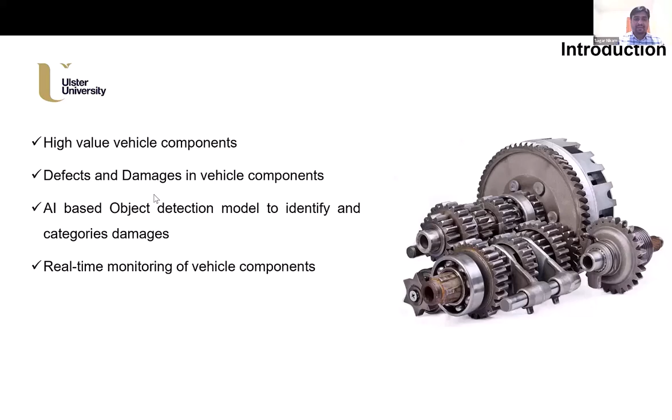Now let's look at the different types of defects or damage that can take place in vehicle components. Vehicle mechanical components are often subjected to stress, friction, and environmental factors, which can lead to various issues. Identifying and understanding these damages is crucial for maintaining the performance and safety of the vehicle.

The first damage is dents or digging, which often happens when a component is hit or impacted by another object. This looks minor, but if not rectified earlier, it can cause a lot of problems.

Next is plastic deformation, where the material is permanently bent or reshaped under stress. This can reduce the part's effectiveness and lead to further mechanical failures.

Another is edge deterioration, which happens when the edges of the component wear away over time, often due to friction or stress. Another is wear, which refers to the gradual removal of material from the surface of the part, one of the most crucial issues in high-usage components.

Another critical damage is cracks, which can develop due to repeated stress or a sudden impact. Cracks are particularly dangerous because they can lead to catastrophic failure.

Finally, there's the defect called heat check. These are defects occurring on high temperature surfaces, or surfaces exposed to high temperature. Due to repeated heating and cooling, small cracks develop on the surface. This type of defect usually occurs in brakes or engines where high temperature is involved.

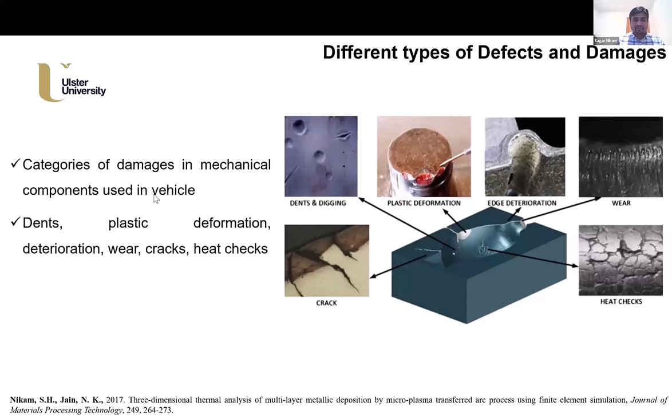If we take a look at different types of damages, understanding the categories of damage is very important from an AI perspective. AI is obviously a data-driven thing, and we humans need to train that AI model based on data. But since humans are involved, we should know what type of damage it is, what are the categories of damage, and what type of damage falls in each category.

Understanding these damages is very important because it helps you take informed decisions. AI can help give an optimized solution, optimized understanding of the damage, and a good repair understanding, but we as humans need to train the AI model.

First, we need to understand the different damages in mechanical components, and how to use these categories to train the machine learning model.

Damages are usually categorized into three main categories: catastrophic damage, manufacturing damage, and operational damage. Manufacturing damage happens in the manufacturing process, but in vehicle components, catastrophic damage and operational damage are very common.

First, let's take a look at catastrophic damage. These are often caused by major issues like faulty design, extreme loading conditions, or using defective material, or by improper handling or improper storage of the material during transportation. This type of damage is very severe and affects the quality of the material.

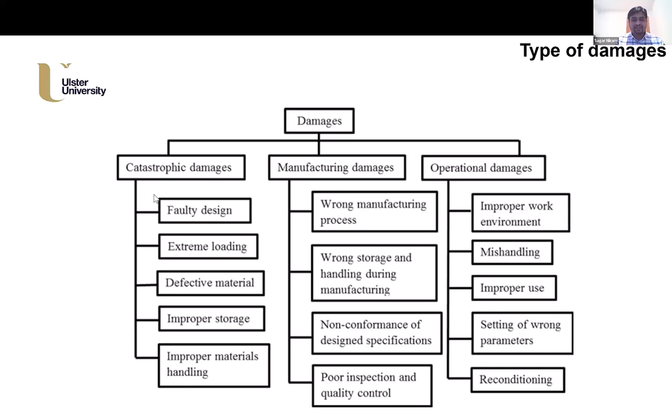These are cracks and broken teeth. If you look at the crack, this occurs when the material is exposed to repeated stress, such as high load or thermal cycles, which eventually cause a small fracture to form. Over time, this crack grows larger, weakening the structure of the gear and increasing the risk of failure. For instance, a crack on a gear tooth can compromise the gear's ability to transfer torque effectively.

The other type of damage is broken teeth, which is even more severe. That happens when the stress on the gear exceeds the material capacity, often due to sudden shock loads, poor maintenance, or defects in the material itself. A single broken tooth can cause misalignment and impact the entire drivetrain, potentially leading to further damage in connected components. What's particularly important to note is that such damages are not just a result of normal wear and tear, but can also stem from factors like improper use, lack of lubrication, or manufacturing defects. AI can help us in early detection of these issues and prevent catastrophic failure.

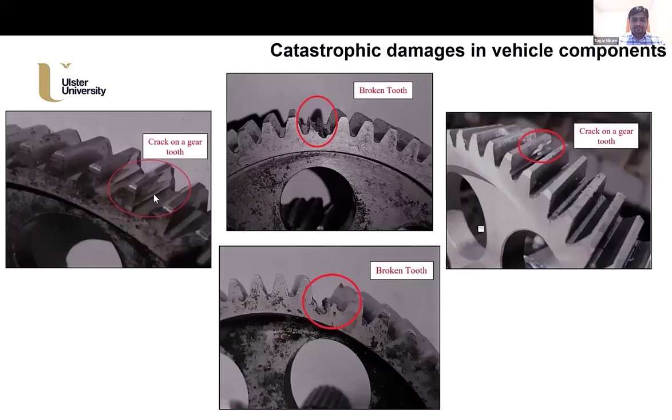Another example is operational damage. Manufacturing damage is more on the manufacturing side, but catastrophic and operational damage occur when particular components are installed on a vehicle and being used in certain environments, and how that usage is affecting or damaging the product. So there's catastrophic damage, and another one is operational damage. Operational damage occurs when components are exposed to challenging conditions or used improperly, which can significantly affect their performance and lifespan.

Another major cause of operational damage is avoiding proper and timely maintenance. For example, skipping regular checks for lubrication, alignment, or wear can lead to faster degradation of the component. So when gears or other parts operate without sufficient lubrication, friction increases and causes the surface to heat up, and this heating wears the surface of the gear component prematurely, causing damage to the surface or heavy wear and deterioration.

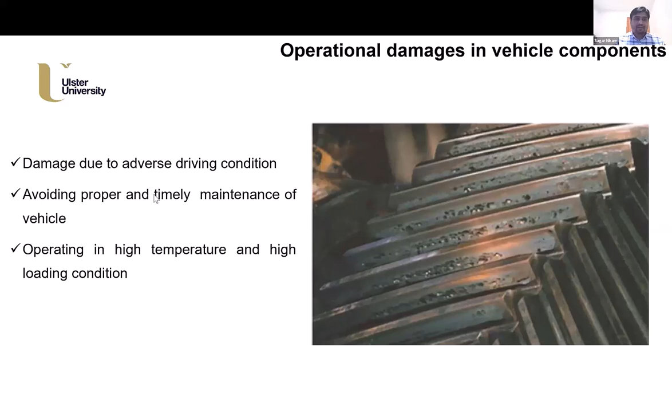So this was all about the damages, as we talked about catastrophic damage and operational damage, the two main categories that come under the vehicle component.

Next comes monitoring - how to look at these defects, how to capture them. This is a crucial part because the vehicle system itself is very complicated, and getting useful data out of it is important, because AI completely relies on data. Unless you have good data, AI can't give us a good informed decision. So the next important thing is monitoring damage and defects in vehicle components.

In modern vehicle systems, for everything there is a sensor placed in the vehicle. Like if you want to monitor the tire pressure, there is a sensor. So everything nowadays is monitored by sensors in the equipment, and along with the sensor...

Any questions here? Right.

Continuously monitoring the health of the vehicle is very important. For this purpose, we have sensors and onboard diagnostic systems. These sensors track parameters like temperature, pressure, vibration, and load in real time, which helps detect early signs of damage and defects - this is the term for predictive maintenance. By doing this, they provide valuable data that can prevent failures and reduce downtime.

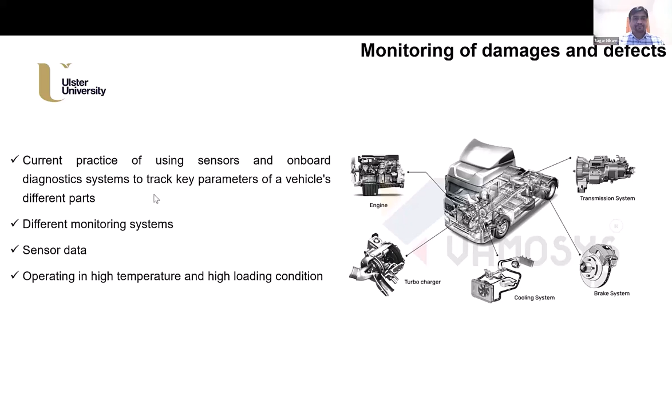Now we are going to look at real-time monitoring. Obviously nowadays sensors do real-time monitoring, but if we have a monitoring system in every car, for example, there is a tire pressure monitoring sensor. The sensor tells you on the dashboard when the tire pressure goes down - at that time it tells you the tire pressure is down, now you need to fill the air. So that's not really proactive sensor information.

We don't do it at real time - we don't get data in real time. Obviously the sensor is capturing data in real time, but we don't get that information in real time. But real-time monitoring is very important nowadays, mostly done in EVs as those EVs come into the market. So real-time monitoring of vehicle components is very important.

For this purpose, for real-time monitoring, we make use of vision-based systems, or test benches designed in labs which are used for data collection. For example, you can see the test bench at the bottom left figure - this test bench is for an engine, which captures every data point for the engine. You capture the data, test the model based on the data received, and once the model is tested on this test bench, you can deploy that validated model on your actual engine, helping track the health of vehicle components in real time.

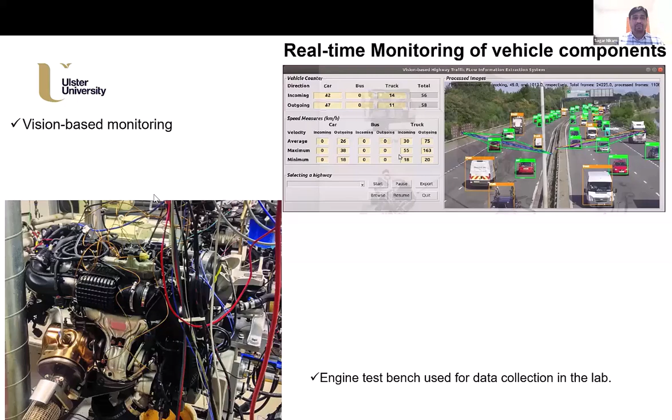That was one of the studies I read recently. It wasn't in a paper, it was a magazine, and I think this particular system was implemented in Birmingham, here in the UK. So that was how they made use of this real-time monitoring system, real-time monitoring sensors, to capture the health of the vehicle or any kind of conditions of the vehicle.

Now these are some examples that I took from the previous test bench. In the previous test bench, a lot of things were captured. One of the data points was real-time torque monitoring. They monitored the engine torque from the test bench to check how the engine performs, and they analyze this data and validate it using the control condition.

In this figure, on the left-hand side we can see the schematic of the engine system. The blue arrow represents the flow of air as it moves through the system, starting from the intake air filter, passing through the compressor and intercooler, and finally entering the engine block via the intake manifold. The red arrow represents the flow of hot gas produced during combustion. This gas drives the turbine shaft, which powers the compressor of the turbocharged system. This flow diagram gives a clear picture of how the air and exhaust gas move through the system.

Now on the right side we have a graph which shows real-time torque monitoring. I'm not sure whether you can see the blue line there - the sensor records the actual torque, and based on that data, the model is trained, and a time series model, or real-time model, is designed which helps you track the actual torque of the engine.

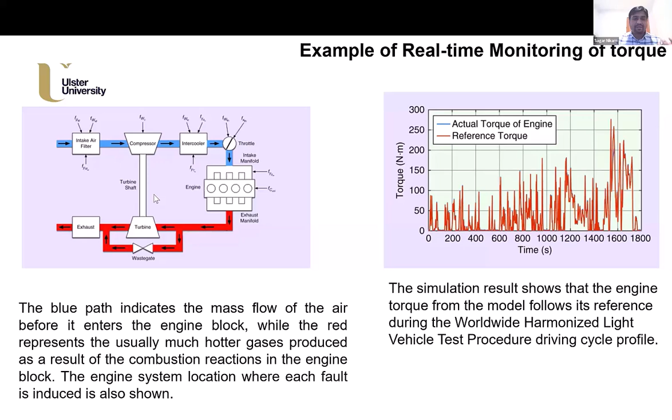There is another red line which shows the reference torque. The reference torque is like - your engine's blue line, which is actual torque, and your reference torque should go together. If there is any abnormality in the system or any kind of issue with the engine torque, then suddenly there is a spike in the lines, which gives you the idea that this particular engine is not performing to the mark that you expected. That is the point where we can carry out engine maintenance work or something like that. So that is more aligned with predictive maintenance.

Another important thing is condition monitoring. It's a very critical process for ensuring the reliability, efficiency, and longevity of various mechanical components. Condition monitoring - the word itself says condition, meaning the behavior of the particular vehicle component when deployed in an actual environment or actual conditions. So monitoring all those conditions - there are different mechanical components in the vehicle, like rotary machines, compressors, pumps, other motors, and these components determine which conditions need to be monitored.

Traditionally, condition monitoring relied heavily on vibration. Previously, only vibrations were measured using sensors, and based on that, analysis was done on whether there were irregularities in the component, or misalignment, imbalance, or wear. Now, vibration analysis is not obsolete, but it's still a very important tool nowadays, still being used for capturing sensor data, but there are other ways as well which can help give the actual picture.

For example, there are thermography sensors, like infrared sensors, or thermal cameras or normal cameras that can help monitor temperature change in components. For instance, we can use thermal cameras to monitor overheating in a gearbox or engine, which can indicate lubrication issues. These cameras usually don't just give a value, but also give a picture of what's actually happening within the system. Or there's the tribological sensor, which analyzes lubrication properties, like viscosity or any presence of contaminant in the lubrication that can cause damage to vehicle components.

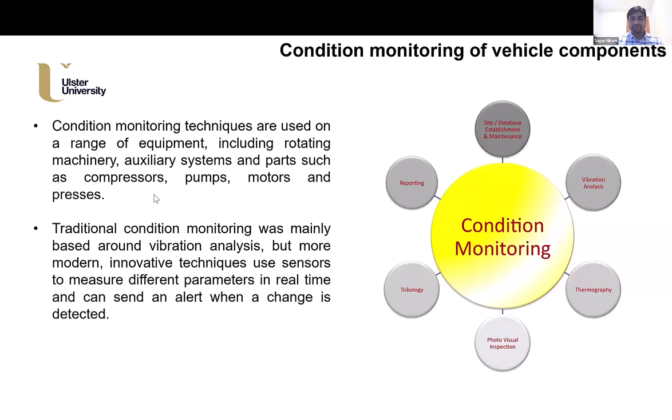So how does this condition monitoring thing actually work? There are three main steps taken up when we do condition monitoring of any components. One is installing the monitoring system, installing the sensors or hardware on the actual equipment, because it's not like we can fix a sensor anywhere. It's very important to identify the location where the sensors can be fixed.

Then we need to capture at least that amount of data which will give us the basics or baseline, or the reference point. That reference point is considered to be a threshold. So if any future values captured by the sensor cross that baseline or threshold, then we consider that particular stage as one that needs to be maintained.

So in the first step, installing the monitoring system, we need to install the necessary monitoring hardware on the equipment. This could include sensors measuring parameters like vibration, pressure, temperature, depending on the type of vehicle or machinery. For example, the sensor on the engine might be very different from the sensor on the braking system.

The next step is baseline data measurement. Once the system is installed, the next step is to collect the baseline data. This involves measuring the normal operating performance of the equipment under standard conditions. Data such as vibration pattern, rotor speed, temperature ranges, and other sensor readings are recorded. The baseline becomes a benchmark or threshold, allowing the system to identify when performance deviates from normal. For instance, if vibration in a gearbox exceeds the baseline threshold, it can indicate a developing issue of misalignment or bearing wear.

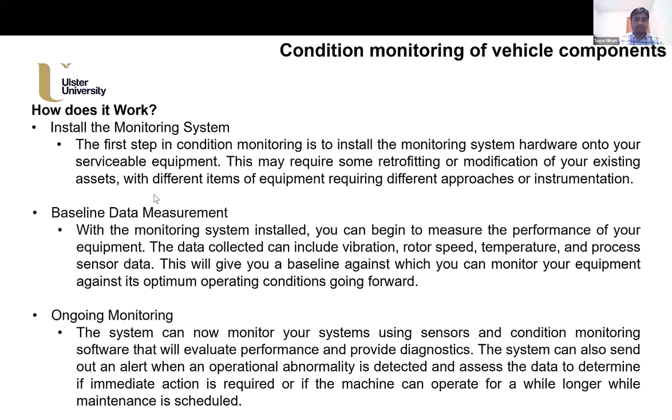Operating under adverse conditions like high temperature or high loading can cause wear and tear on the part. For example, high temperature can weaken the material, and this can cause excess load on the gear, leading to damage. So condition monitoring ensures that such issues are identified early, and by analyzing real-time data from sensors, the system can track performance, compare them to baseline values, and generate alerts when abnormalities are detected earlier, helping you to condition or overhaul the vehicle quite early.

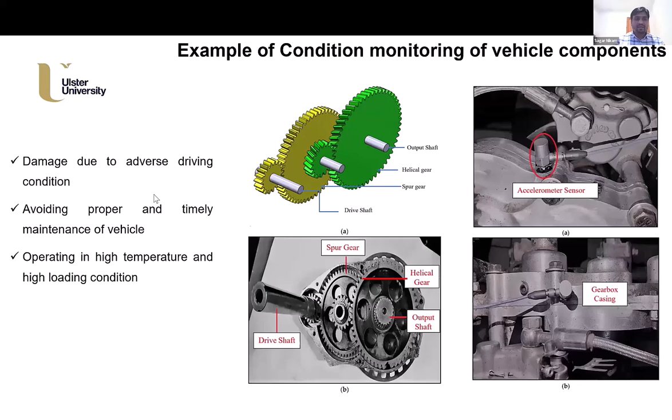So this is the result or outcome of the accelerometer sensor seen previously, which captured the vibration signals, and based on the vibration signals, decisions are being made. For example, if there is increased amplitude in the vibration signal, this might suggest that there is a misalignment in the gear or an imbalance in the drive shaft. Or, usually we look for a good proper pattern or trend line, but suddenly there is a change in the trend line from which the data is coming in.

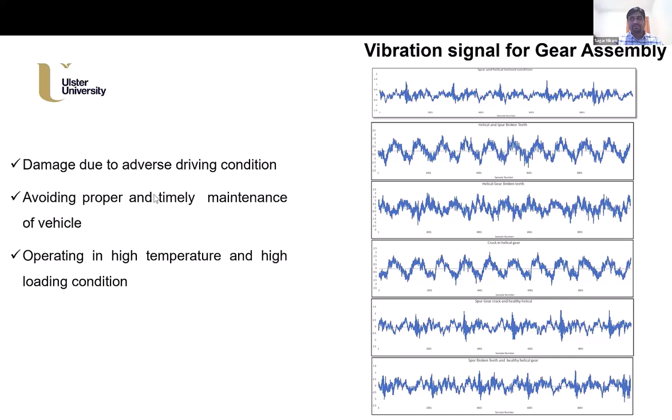So we can say that at that point there is high wear and tear, or there is pitting on the gear teeth or a crack that causes high stress. Or, for example, the data has been captured smoothly, but suddenly there is a high spike, which indicates a severe problem, like damage in some component. If we take the gear component, there can be damage in the gear tooth, like a broken tooth, which causes a lot of sudden vibrations in the component. This is how the information is derived based on the data captured from the accelerometer sensor.

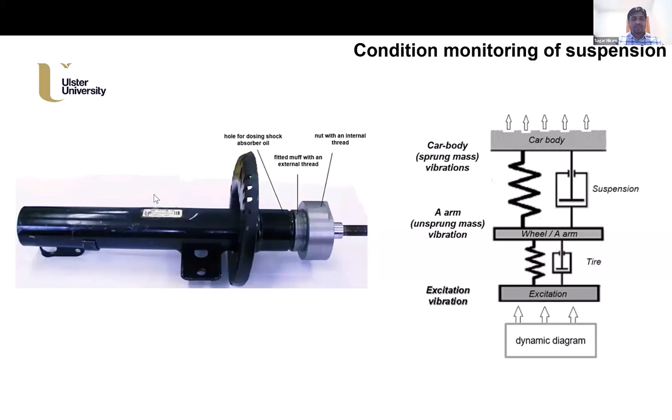Another is the condition monitoring of the braking system. Here, a temperature sensor is used to continuously monitor the brake pads or the brake disc, which helps capture the condition of the brake element. For example, if there is a sudden rise in temperature, it indicates high friction between the pads and the disc, which suggests a lubrication problem, and we need to overhaul the vehicle for proper lubrication.

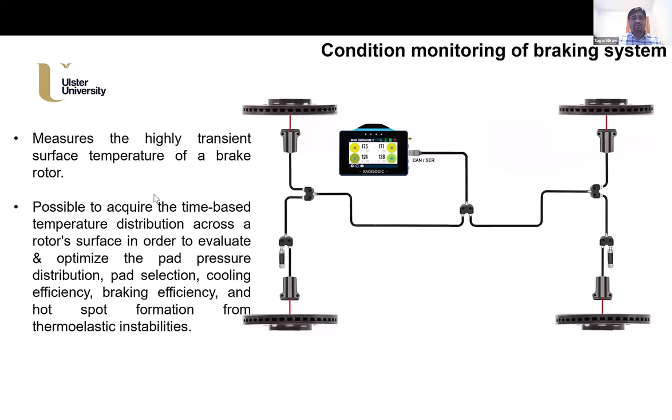If the temperature suddenly increases beyond a certain limit, causing high heating of the disk, that can be captured using thermal sensors, IR cameras, or thermal imaging cameras, which help monitor the condition of the braking system. If the temperature exceeds a certain value, it indicates wear and tear in the brake or the pads, which then need to be replaced or changed. So this is about condition monitoring.

These are the different types of sensors additionally being used to monitor conditions. There are more, like pedal sensors or pedal force sensors, used to monitor how you're pressing the accelerator or brake. Everyone has their own driving conditions, and this shows how much pedal force is applied - some might apply a small amount of force, others a higher amount. So this type of sensor is used for that.

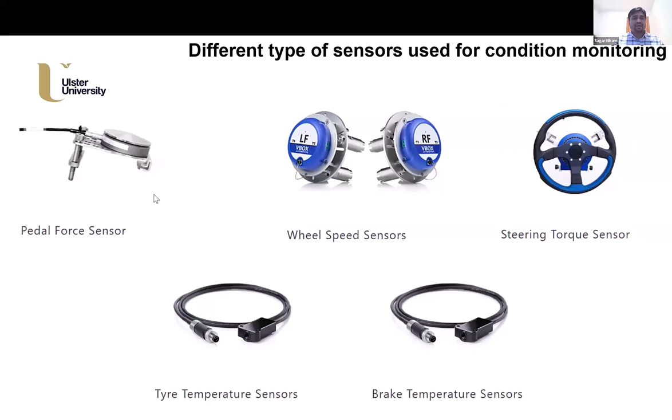There is a wheel speed sensor that can monitor speed. There is a sensor on steering torque, for the speed of rotation, how the steering is being operated. Then there is a tire temperature sensor, very commonly used in every vehicle, and the brake temperature sensor, which generally monitors brake conditions.

Previously, these particular conditions we call offline conditions - a sensor is placed on the vehicle component, we collect the data, and then use that particular data to make informed decisions.

But as we advance technologies, electric vehicles are coming, especially with Tesla. Even in India, different EVs are coming which make use of online condition monitoring. There are also other heavy equipment where they go for online condition monitoring. Online condition monitoring is more about the Internet of Vehicles, called IOV, where they monitor the condition of the vehicle at some other location.

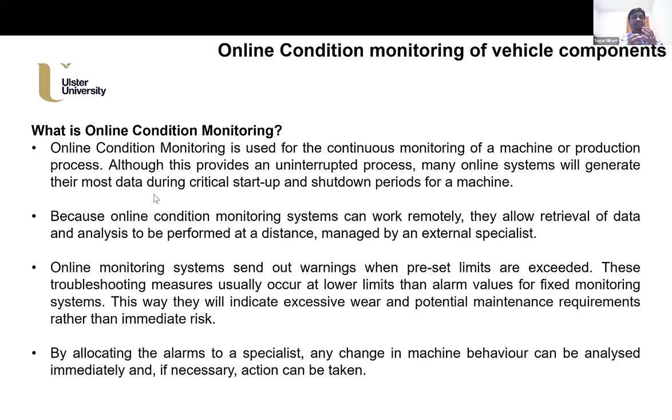This particular sensor continuously shares the data with a dashboard at another location. So it's like monitoring the condition of the vehicle from a distance and making informed decisions in real time, continuously looking at the machine or vehicle components, and giving instructions if there is any interruption or problem with the machine, giving an indication to the operator beforehand.

Now, how is AI or ML helping in monitoring? Till now, we looked at how the data has been captured, whether through sensors - offline monitoring - or through online monitoring. Now let's try to understand how AI and machine learning is helping the monitoring system.

Particularly in the context of vehicle condition monitoring, AI is not a new thing now - it's been used since traditional computing systems. Initially, when we used AI, it lacked intelligence - it just helped you understand the trend line, but didn't give any optimized instruction or information. Initially, artificial intelligence was meant to mimic human intelligence, allowing the computer system to make decisions and adapt to new information and solve problems, like how humans operate in uncertain conditions. For example, AI can analyze sensor data to detect patterns and abnormalities that were previously missed with traditional methods.

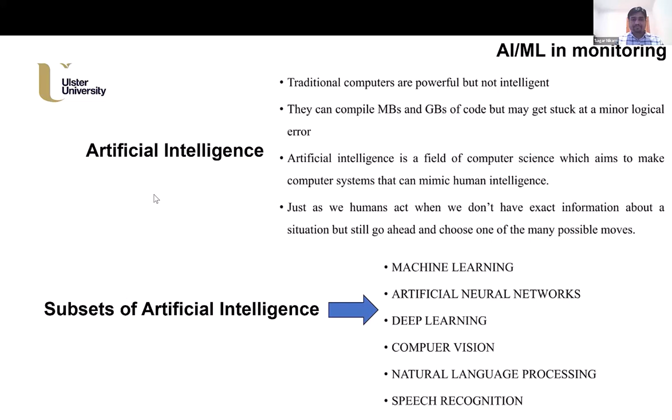So if you look at the first category of AI, that is machine learning. Again, it's a subset of AI. Machine learning provides a system with the capability to learn from data without being explicitly programmed. It takes information from the data, and it helps you understand the system.

If we break down the concept of machine learning, the primary goal is to impart learning to machines by feeding the system with large amounts of data. It's expected that it should be real world data, but capturing data is also not that easy. So nowadays researchers are coming up with simulated data. What they do is validate a simulation with real world data, and then use that simulation data to train the machine learning model.

So it's not just feeding straight forward, but feeding over time. At the end, the most important thing is that your model should give you the desired output you're expecting. The machine learning system actually improves over time through iteration. As more and more data is fed to the system, the more accurately the machine learning model can perform, and it can help in vehicle monitoring.

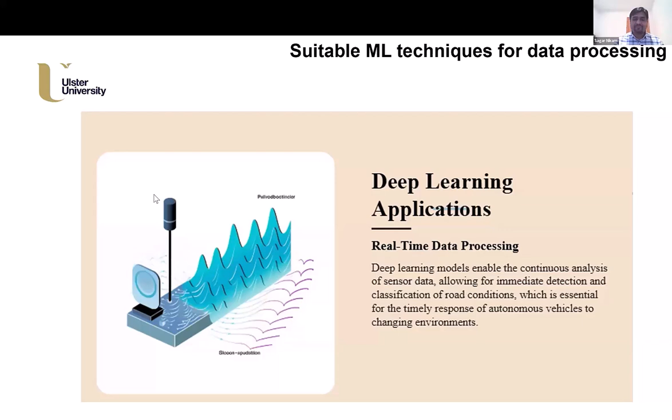You train that model, and once the model has been trained, you inject your data into that particular model, meaning you train it and then test it on your data. Once you do that, it will take benefit of feature extraction from the generic data and your data, and give you a good informed decision in a quicker way. So that is how the deep learning model works.

Another is the time series analysis. This is another way of data processing and machine learning. Time series analysis is more aligned with vibration data, or data like we discussed in the previous slides about the test bench, where the engine torque data, like a high engine torque, is used. In that case, a time series model can be built with that data.

The time series model looks at the trend, how the trend is behaving, and that trend line is used to detect defects. If there is any defect, the future step, the third step, is to use that time series model to forecast any future defects. So this is more towards predictive maintenance.

For example, you are replacing the brake pads every year or every two years. The data tells you that every two years you are replacing the brake pad. This is the usual practice we do, which is normal predictive, normal maintenance. But predictive maintenance helps you understand when to replace those particular brake pads or any other elements in the vehicle components. This is when time series data analysis is very important when we go for predictive maintenance.